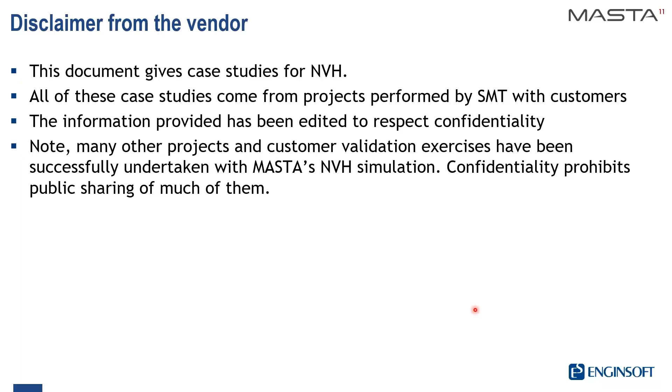First of all, a disclaimer, because the contents are related to a case study that was performed about NVH, and so the results and the explanation will be limited to the main points in order to protect the NDA we had with the customer that asked to provide these results.

What will we see? First of all, I will present you the case study. Then there will be a description of the model that has been used at the beginning of the study, and then the analysis of the first modifications and the first results that have been obtained. Then the further design and a criticism of the preliminary modification criteria. And because of that, deep model refining and the show of the results, and last but not least, the conclusions.

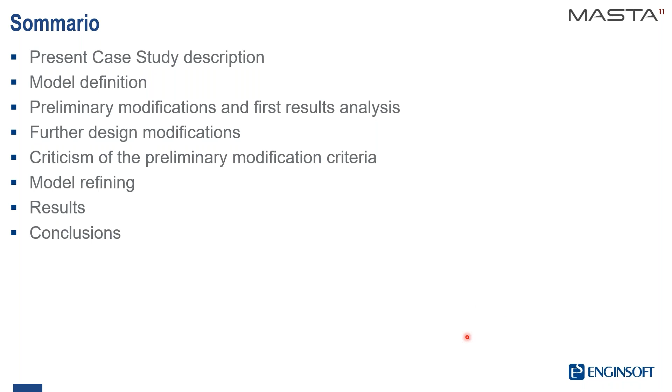So let's come to the case study description. The problem was that a gearbox has been found to be too noisy as installed in production van with high unit variability, so also a production problem. The solution passed through extensive testing, MASTA modeling, and development of significant design changes and modeling results to identify and quantify the manufacturing requirements for the critical dimensions for noise control.

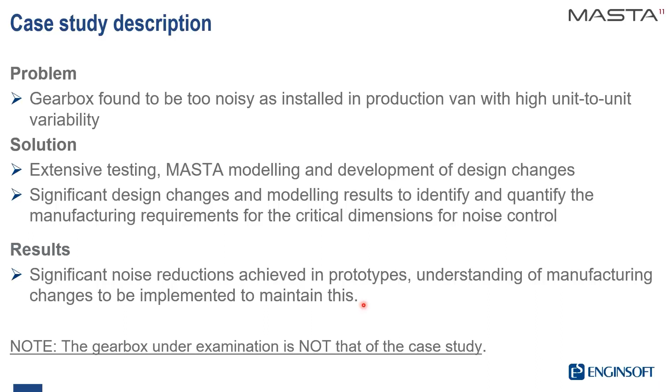As a result, a significant noise reduction was found in the prototypes, and especially an understanding of manufacturing changes that have to be implemented to maintain this solution. A note by the writer is that the gearbox under examination is not that of the case study. This is to protect the customer.

So a little deeper about the case study. During the prototype test that was performed on the complete vehicle, people were able to hear the typical whine noise coming from the speed reducer. So a lot of tests have been performed on the test rig by means of phonometric measurements, and a lot of noise levels emitted were measured.

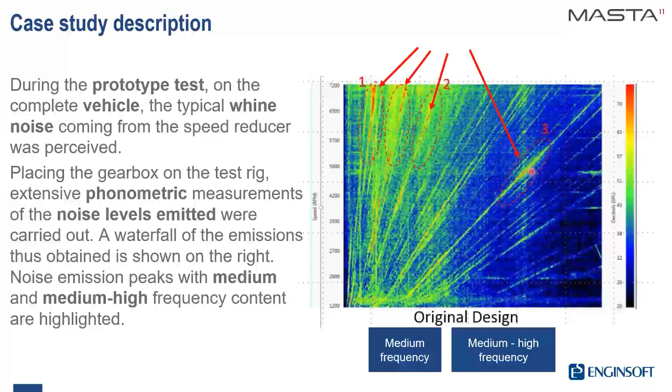So the model has been defined in this way. You can see here a 3D image on the upper side of the slide, while on the right side you can see a section schematic. To solve this problem, the study started from a simple model where the shafts are axisymmetric according to Timoshenko theory, modified for shear. The bearings are coming from the catalogs. You can see here the ball bearings and the cylindrical roller bearings.

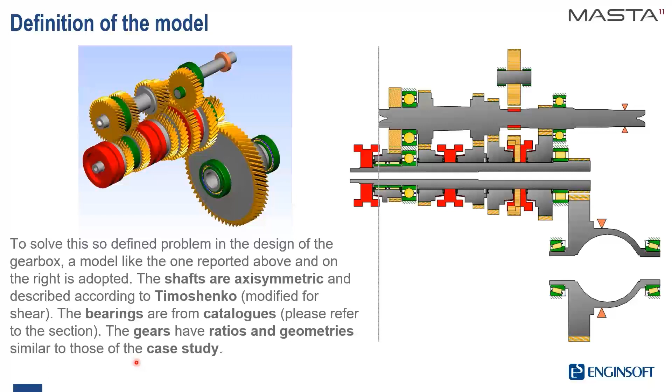And the gears have ratios and geometries that are similar to those of the case study in order to have results that can be considered in similarity. The problems that are addressed here have a reference to the fifth gear. That is the gear couple you can see up here. And the procedure that is reported in the following was carried out in the same way also for the other gears in the gearbox. So we concentrate our attention only on the mesh of the fifth gear with the output gear transmission.

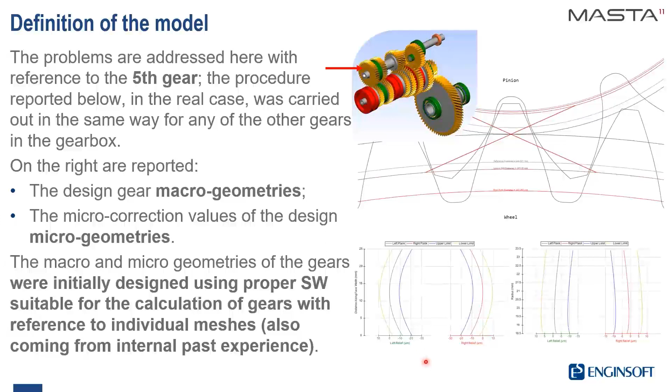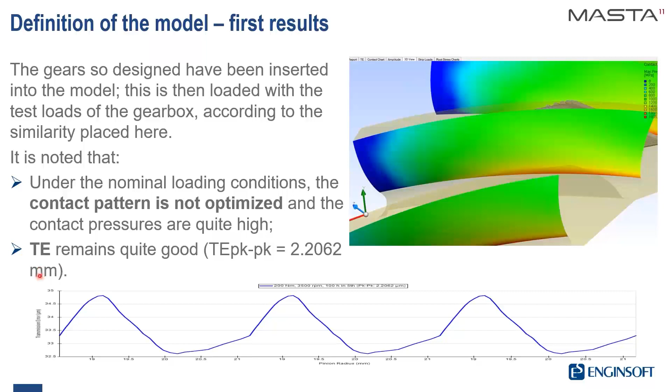And after a first run, we can notice that under the nominal loading condition, the contact pattern is not optimized and the contact pressures remain quite high. So you can see here that the contact is on the right side of the tooth flank, and you can see a high pressure in correspondence of the root of the teeth. The transmission error remains quite good and acceptable. The peak-to-peak value is 2.2 microns. This is microns, not millimeters, of course.

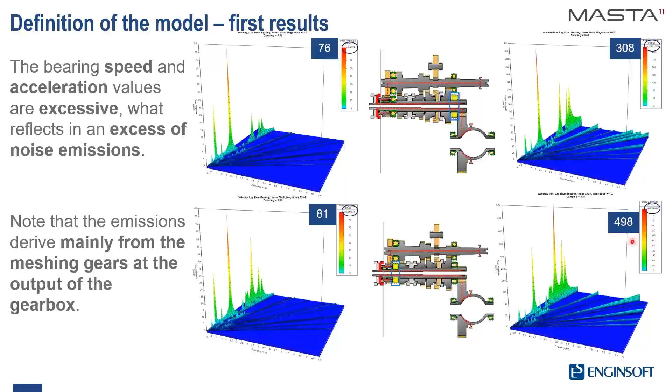The values that are calculated in this situation are about 76 millimeters per second and 300 meters per square second for the bearing. On the other side, on this bearing, it's 81 and more or less 500 meters per square second, that are really high.

So the first step that is generally followed to solve this kind of problems, or generally the problems in gearboxes, is to refine the gear mesh micro corrections. So a lot of preliminary DOE analyses were performed in order to see which could be the best solution for the micro correction of the gears of the gear mesh that are reported here, and reported some results referring to crowning and barreling relief, that is the continuous correction on the involute.

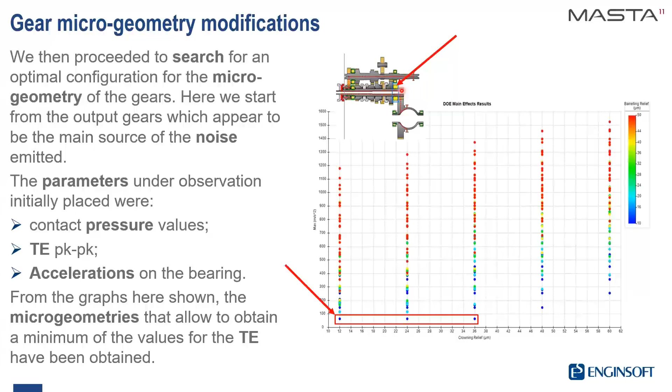Here you can see that there is a solution that is referred to 3 different kinds of corrections that minimizes the values for the acceleration on this bearing. So the 3 solutions were examined deeply, and only one of these 3 was selected to go on with the study. You can see, if you remember the previous results, that the crowning is very similar, while on the involute side, the correction is completely different and increases a lot.

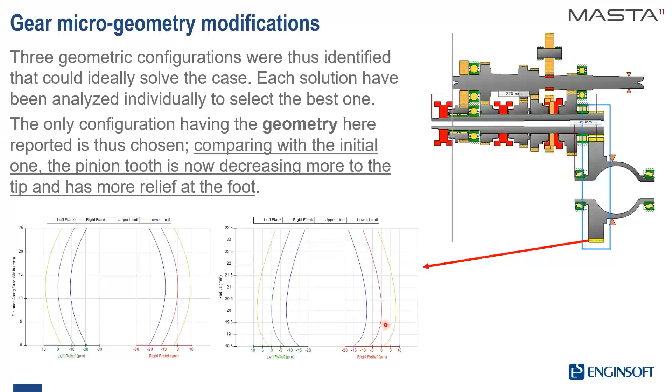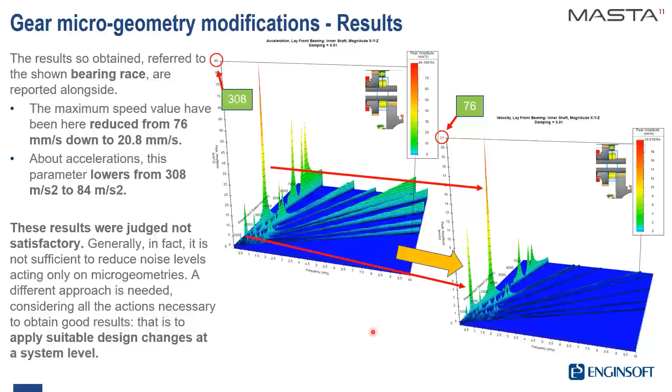These results were judged not satisfactory. The vibratory conditions of the gearbox simulated are still too high. So we have to apply suitable design changes considering the changes at a system level and not only on the gear level. To understand what has been done in the next steps, I would like to repeat some ideas or knowledge that we already have in mind.

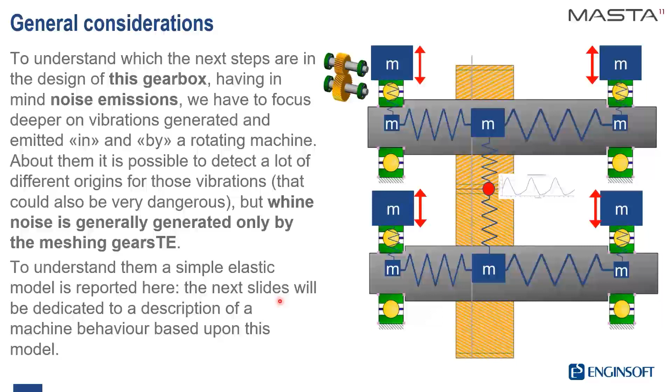And I go a little deeper in the description of the way of working of this model. Here you can see that springs and masses have been used, and also some indication of a pulsating force. The pulsating force is generated by the transmission error that arises during the working of the gears in mesh. The transmission error here is applied between the two meshing teeth surfaces. You can see here an example of transmission error, and it depends on the geometry of the teeth, the macro and the micro geometry, the stiffness of the teeth, the load in the mesh.

Then this is transferred passing through the springs, the masses, and I didn't report also the damping that is in parallel with the springs. A note has to be made about the springs, because each spring reported here is in reality to be considered as a stiffness matrix of the gear, for example, of the shaft or the bearings, and the mass has to be considered as the mass matrix of the system.

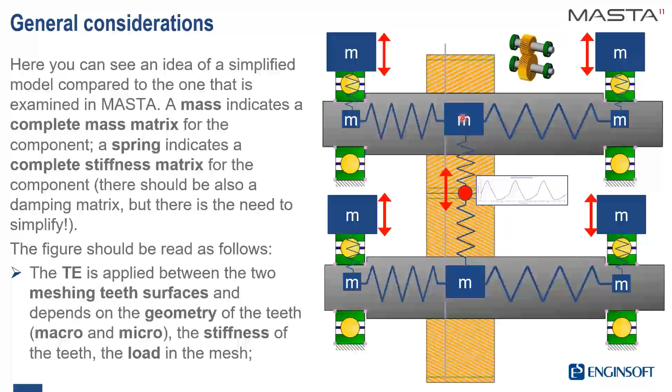So the irregularities during the meshing generate, as seen, a transmission error that generates forces that are transmitted by means of the gear. And these forces that you can see here about the transmission error depend on the position inside the pitch line. And they are repeating exactly with the number of the teeth or the pitches that are in the gear.

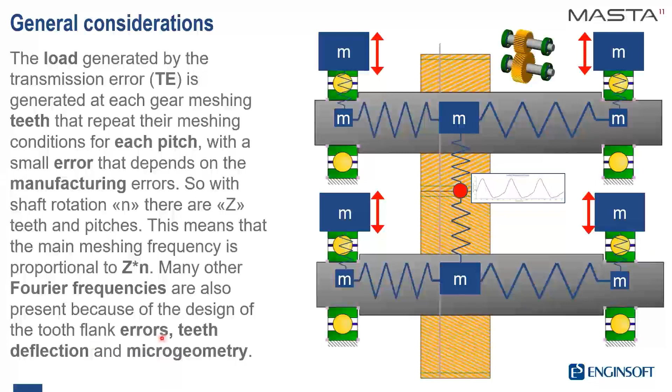So if n is the shaft rotation and z is the number of teeth or pitches, this means that the main meshing frequency, so the first meshing frequency, is z times n. If you measure the acceleration or the velocities with a proper accelerometer, you can see that many other Fourier frequencies are also present because of the design of the tooth flank errors, teeth deflections, and microgeometry.

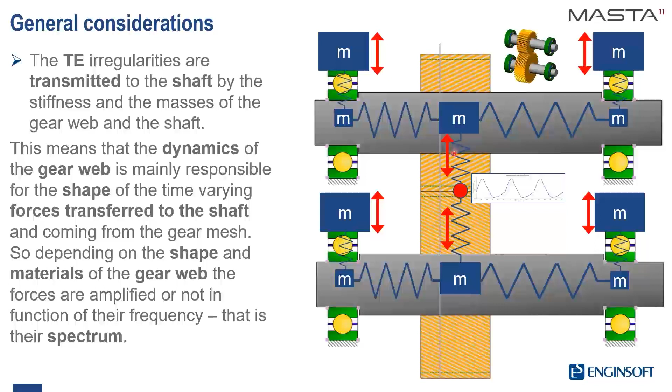The irregularities on the transmission error are so transmitted to the shaft, and these are transmitted to the shaft depending on the dynamics of the gear, the dynamics that derive from its stiffness and geometry on the gear web. The shaft then receives the forces from the gear and transmits them by means of its dynamics or transfer function to the place on the shaft in which the bearing is located.

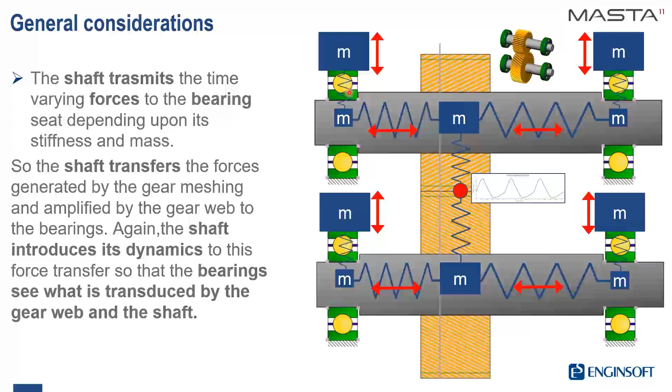So the shaft is transducing the forces coming from the gears to the bearings, and the bearings themselves, depending upon their inner dynamics, are able to transmit the loads received from the gear passing through the shaft to the housings. The transmission function of the bearing depends on the model of the bearings that we are considering. We know that oil film bearings have very high damping characteristics, or depending on the fact that they are rolling bearings. Depending on the bearing position, because of the inner equilibrium inside the bearing, and the configuration that the bearing has during the mesh.

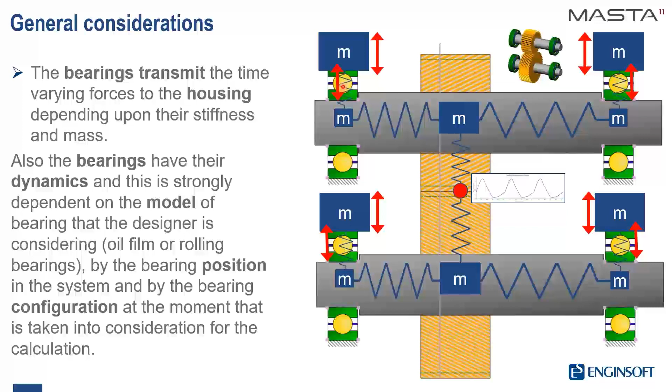The housing then vibrates, and its surface excites the surrounding air, so generating the sound that we perceive with the ears, the so-called airborne noise. The housings generally have very large dynamics, and are able to vibrate in a very large band of the spectrum. This means that the surface of the housing is able to excite the surrounding air in a very large spectrum of emissions, with amplitudes and intensities of pressure fields that depend on the housing surface excitation spectrum, by the physical status of the air, depending on the mist, for example, and the ambient all around the housing of the gearbox.

For example, objects or walls all around the housing that are disturbing the acoustic field so generated, so that in real cases, the free field acoustic emission is never reachable. We are each time working with a reverberated or confined acoustic field.

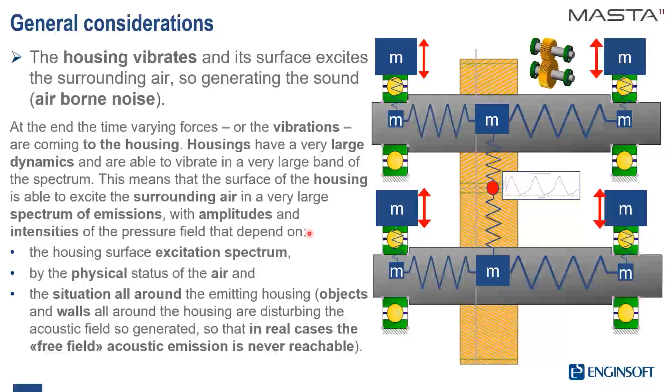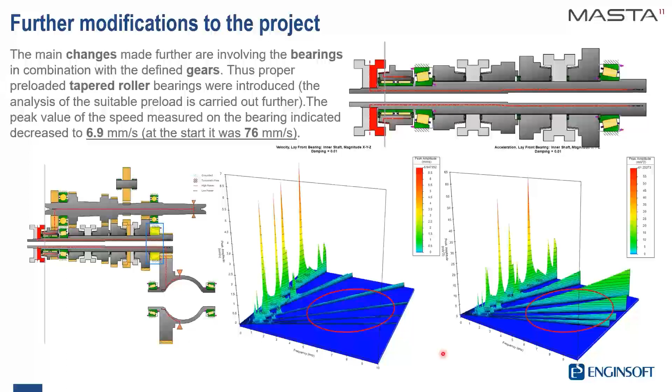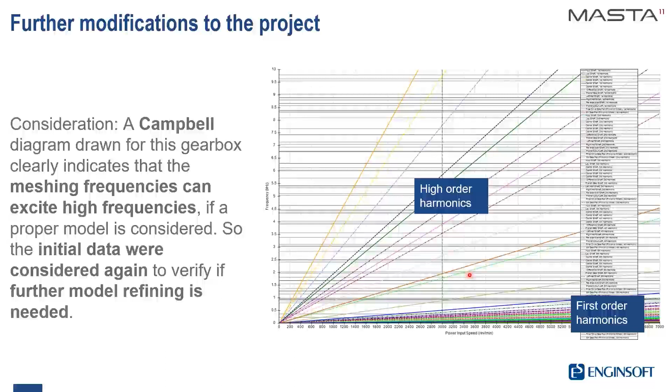And what we can see is that all these harmonics should be able to excite some of these modes. So it seems strange, analyzing the results on the previous slide, that there is no order reported as a result. So it was better to review the initial conditions of the problem.

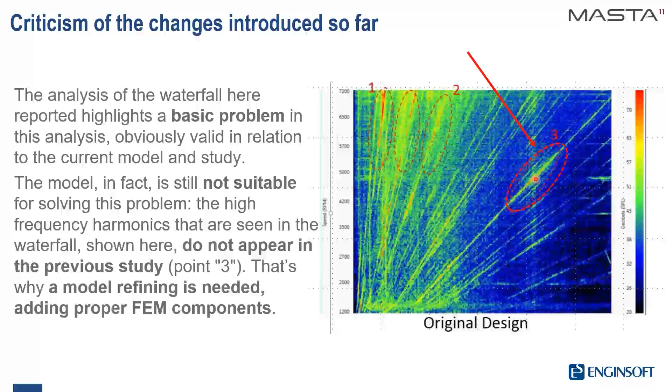And analyzing the initial waterfall that I reported, we can see that there are, yes, some orders that are exciting in a bad way the sound all around the gearbox, but there is also another order here that has a peak well around 4,000 hertz. That is more or less the maximum sensitivity area for the human ear. So we need to refine the model we have used more deeply.

And the choice has gone in the direction of changing the dynamics of the output shaft. Here we have the differential that, if you remember, was modeled as a simple shaft, a Timoshenko shaft. While in this case, we prefer to have a FEM description of the housing and the output shafts, and also we want to introduce the straight bevel gears that are inside the differential, and also the cross support of the bevel gears inside the differential.

In this way, increasing the dynamic level of the last shaft, we obtained a waterfall diagram that is much more significant of the behavior of the gearbox we are analyzing. We can see here the first order cut that refers to the output gearing mesh, while in the central part of the waterfall that just before was reporting nothing, we can see that there are some peaks that are also putting in shadow the high peaks we were able to measure referred to the output gears.

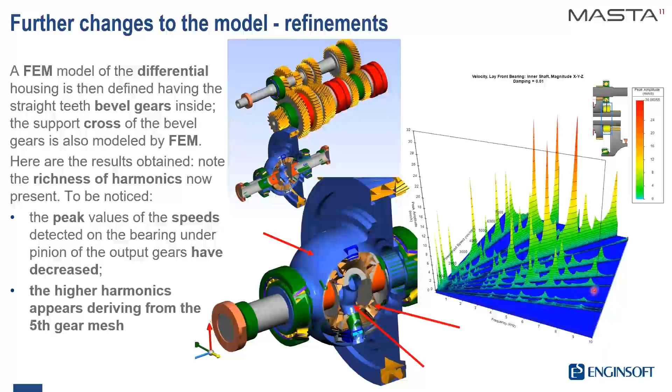Here we are reaching more or less 30 millimeters per second instead of the 20 millimeters per second of the previous analysis. And you can see that there are also a lot of different harmonics at higher frequencies. So having in mind these results, we have further introduced in the model a lot of different modifications in terms of optimal microgeometry of the teeth, preloaded taper roller bearings on the secondary shaft, and bearing preload on the differential housings.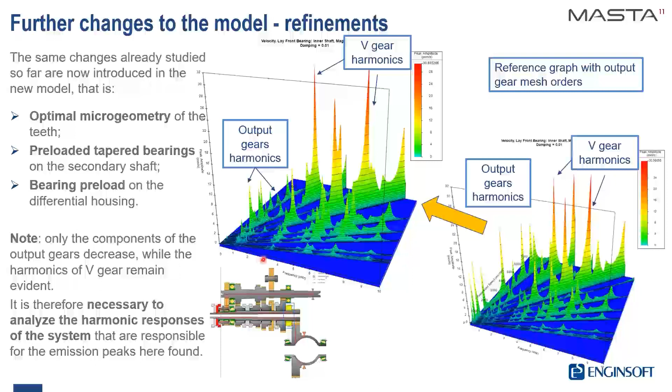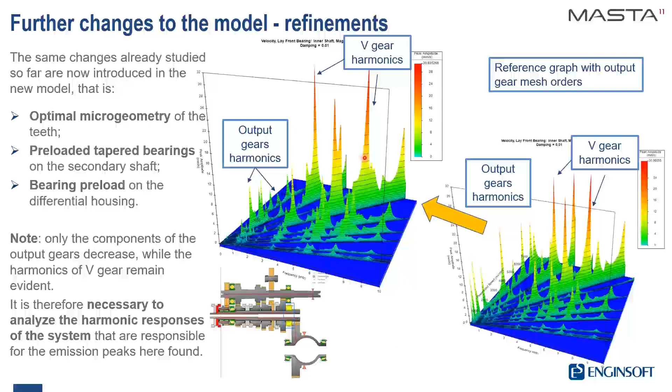What we have seen is that all these modifications are reducing the values of the emissions in the first order cut that refers to the output gear only, while acting only in this way, all the orders related to the harmonics excited by the fifth gear remain really evident. So this forced us to introduce a lot of different modifications, starting with the way the gearbox is responding to the harmonic excitation given by the fifth gear.

And here, considering, for example, one of the peaks in emission that was measured on the bearing, I reported the printout of the eigenvector, let me say, so the deformed shape due to the response to the fifth gear harmonics excitation. And we can see that the first shaft has a very low stiffness, that the right side of the shaft is deforming and exciting the output gears a lot. You can see that the output gear is exactly in this direction, and that also the secondary shaft is deforming a lot, and this is because the gears have quite high masses.

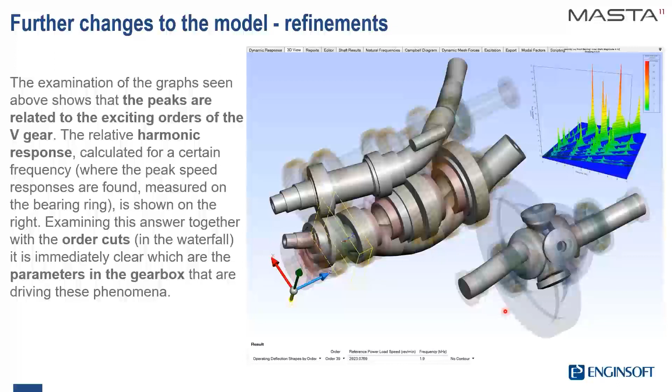So it is necessary to increase or to design in a better way the geometries of the shaft to make them a little bit stiffer and lighter. Another point that you cannot see here is that here, where you can see the fifth gear in mesh, the body of the wheel of the fifth gear is being excited in counter phase with respect to the secondary shaft. So all these thoughts have been reported in order to reduce the emissions of the gearbox, starting from the bearings, which are a good starting point to stiffen the shaft.

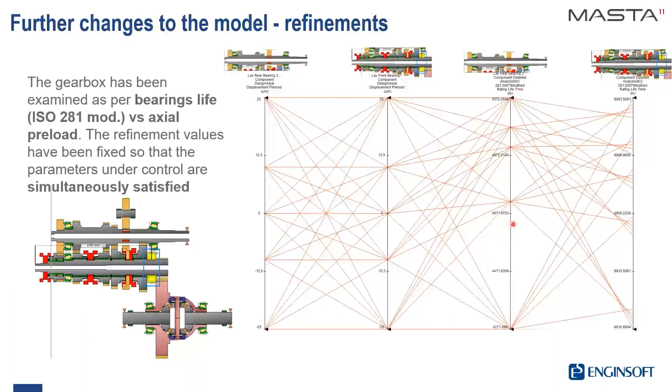A proper preload has been defined by means of a DOE analysis that considers simultaneously the effects on the bearing life, the four bearing lives that you can see here, of applying the proper preload. The preload of the primary shaft is reported here, the preload of the secondary shaft is reported here, and here you can see all the different spider connections that the different preloads have with the selected bearing life.

So after having defined the bearing preloads, the geometries of the shaft, the bearings on the input shaft and the secondary shaft, the micro-geometries of the gears, and after having modified the design of the gear bodies on the secondary shaft, these results were obtained. And to ease the comparison between the previous one and the last one, I reported them inside a 3D waterfall having the same maximum value on the axis.

You can see that here, in this area, there were all the harmonics of the fifth gear, while here they are practically completely eliminated.

The harmonics on the first order cut, that is related to the orders excited by the output gear in mesh, are very, very low, while there are a couple of peaks here that are less. Here we are working with less than 10 millimeters per second, while this peak is in the range of the engine that is close to 7,000 RPM, in which the engine is not used. So at the end, this kind of results were considered at least preliminarily acceptable.

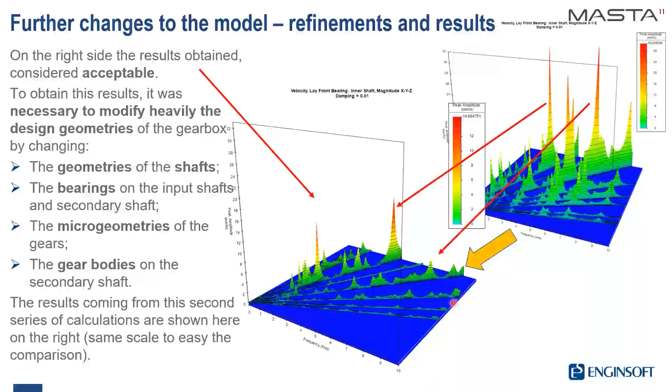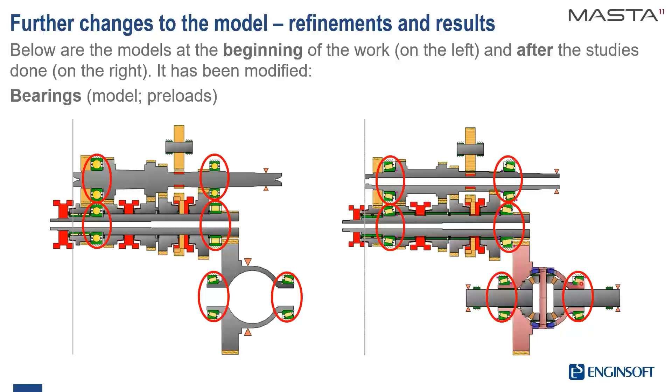To obtain these results, I'd like to show you which are the main modifications that have been introduced. In order of bearing modification, you can see here on the left side of the slide the situation of the gearbox as it was designed at the beginning of this job, and on the right side you can see the design of the gearbox as it is at the end of this job. So the bearings on the input and the output on the first shaft and the secondary shaft have been changed with taper roller bearings with the proper preload calculated as seen before. And also on the differential shaft, a preload has been introduced.

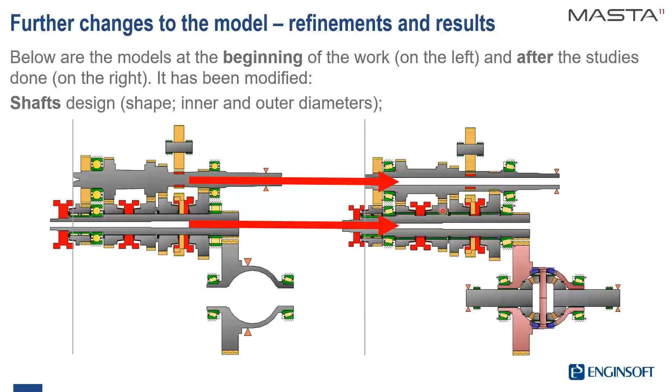The shaft design has been changed in order to increase the external diameter and reduce the weight on the extreme parts, the two ends of the shaft, to the right and the left, in order to reduce the effect that was given by the strong deformation that was measured here in the harmonic response we analyzed before. Also, the output shaft had been changed in terms of geometries, increasing the diameter and so changing also the stiffness of the bearings that are reported just below the gear's body.

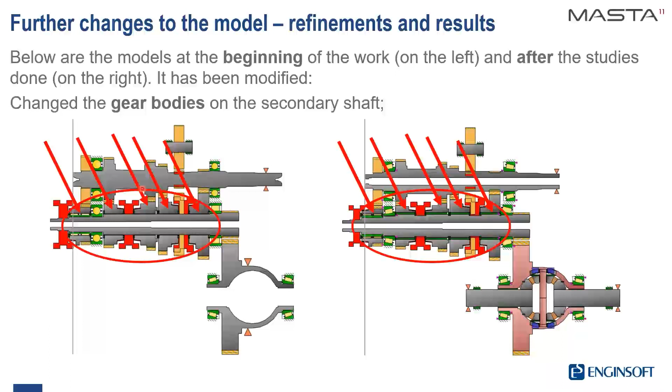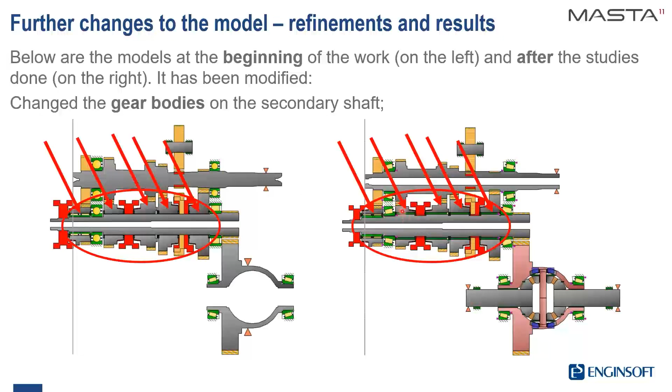Another change is due to the reduction of the masses, as I already described in the previous slide, but you can see that also there is a different selector here for the synchronizer. All the gear bodies on the secondary shaft have been changed in order to reduce as much as possible their masses and to increase the stiffness of their connection with the output shaft.

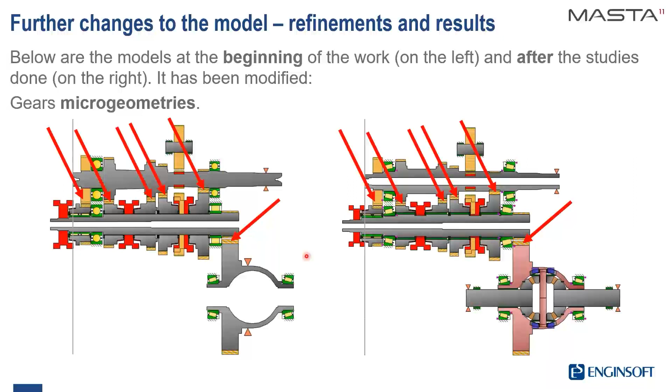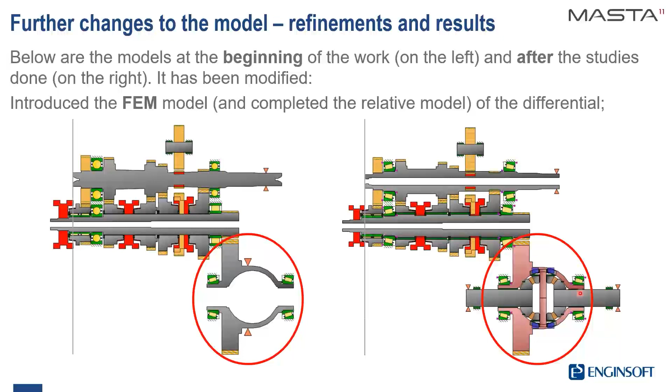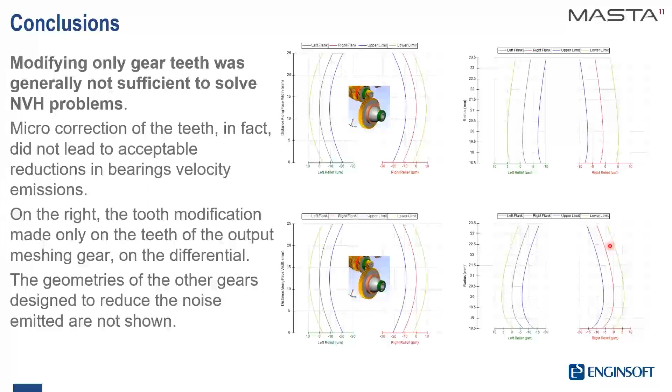Also, the gear micro-geometries have been changed in all the gears, and if you consider that generally a lot of people are referring to only modifying the gear mesh, you can see that this is only one action among a lot of others to reach a proper result. Fundamental in this study was the proper description of the dynamic behavior of the differential, introducing the FEM of the housings. So as a conclusion, we can say that modifying only gear teeth was generally not sufficient to solve NVH problems.

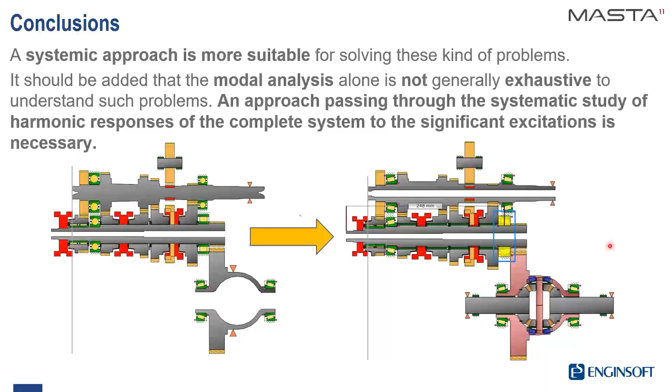In addition, we have seen that a systemic approach is more suitable for solving this kind of problems. And it should be added that the modal analysis alone is not generally exhaustive to understand such problems. It's much better an approach that passes through the systematic study of the harmonic responses of the complete system to the significant excitations inside the gearbox. This also means that the design of the complete gearbox should be drawn having clear in mind that one of the main targets is NVH.

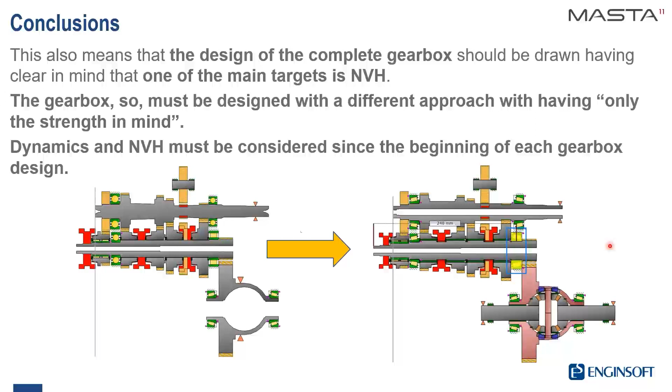And so the gearbox must be designed with a different approach, not having only the strength in mind. The dynamics and the NVH of a gearbox must be considered from the beginning of each gearbox design, and it is possible with the software that is now on the market.

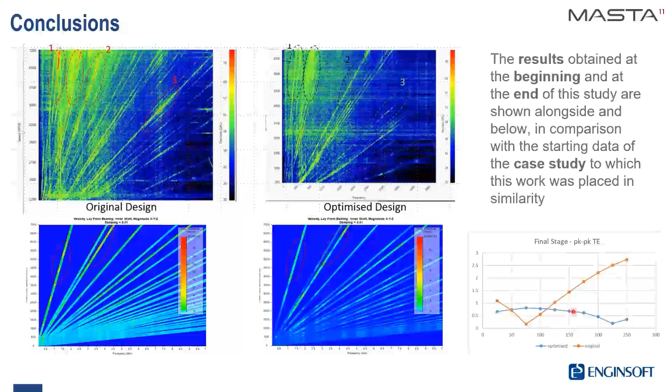The last conclusion is the comparison with the case study. You can see the first waterfall that we have seen and the results obtained. And here we can see in the same frequencies the starting gearbox reported in this waterfall, and here the optimized waterfall obtained all along the study. Here a typical indication reporting the torque on the x-axis, and here the peak-to-peak transmission error of the original design and the optimized gear that has been obtained for the output gears in this study.